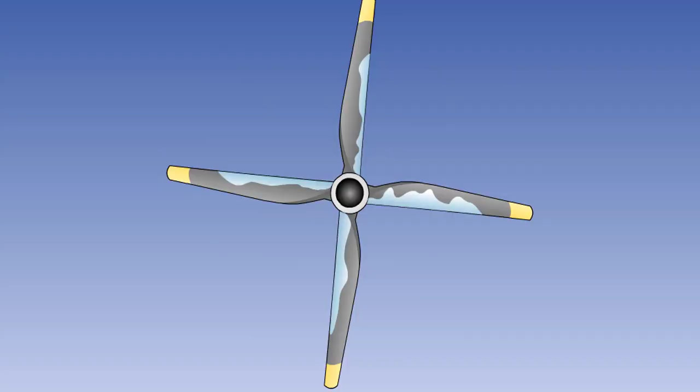Ice formation on a propeller blade produces distortion to the aerofoil section, causing a loss in efficiency and possibly causing unbalance, which can lead to destructive vibration. The build-up of ice must be prevented, and this is usually done by electrically heating the propeller blades.

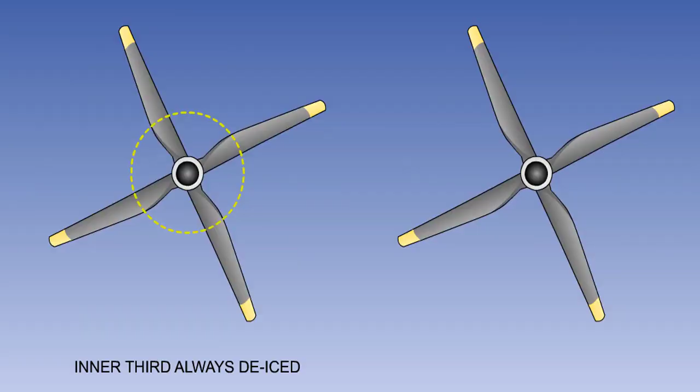Because of its thickness and lower speed, the inner third of the propeller blade is most susceptible to icing, and is always de-iced. In some installations, the middle third is also de-iced. The outer third of the blade is not so susceptible to icing, and is not normally de-iced.

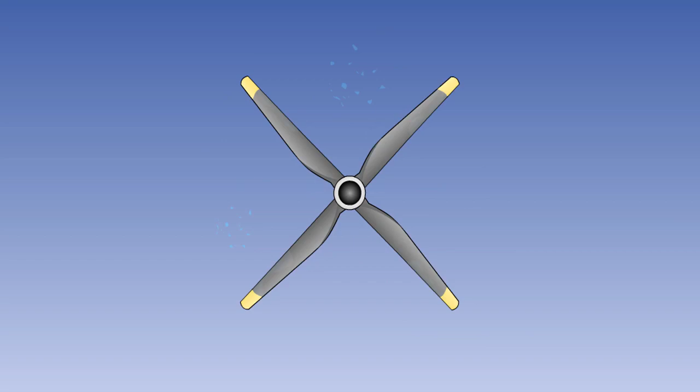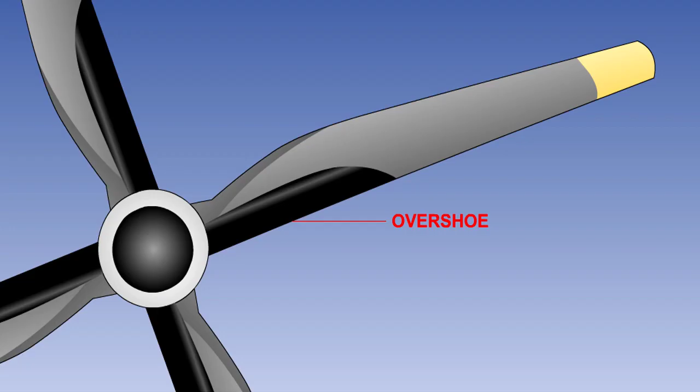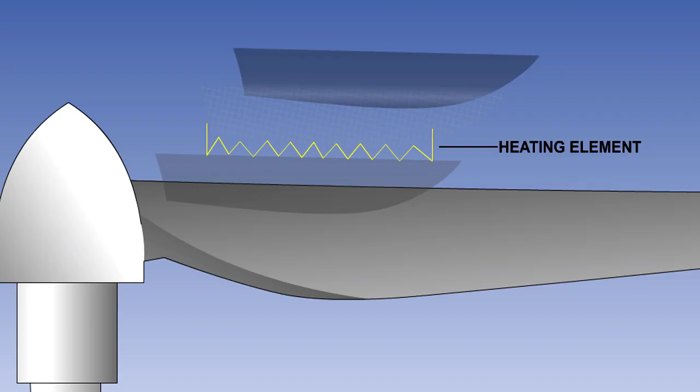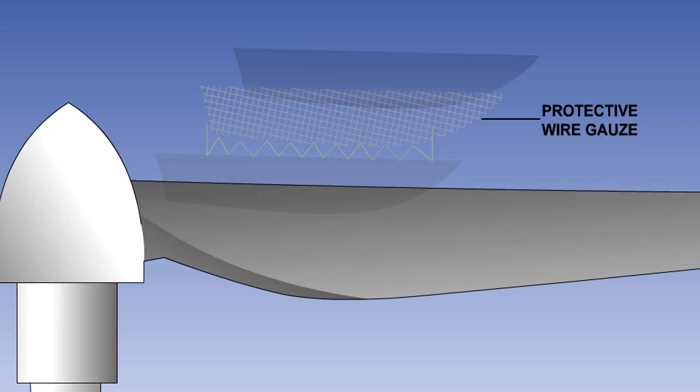The electrical heating elements are usually fitted in components known as overshoes or boots. The construction of the overshoes varies between propeller types. In a common installation, the heating element wires are interwoven with glass threads, which form a glass cloth base, which is cemented between sheets of rubber. A protective guard of wire gauze is cemented beneath the outer rubber covering. The overshoe is shaped to fit around the blade leading edge and is cemented to it.

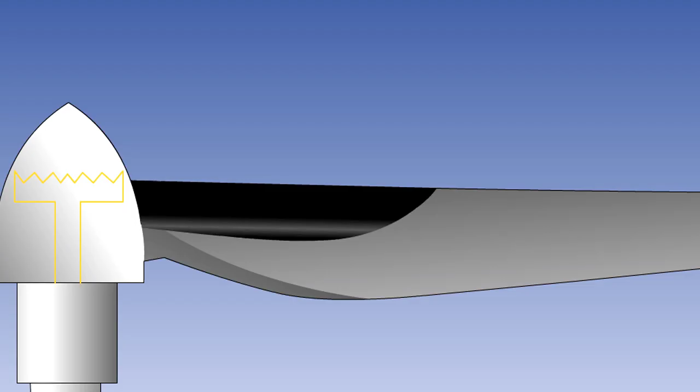In the case of turbine engine propellers, the cover over the pitch change mechanism, or the spinner as it is known, may also have electrical heating elements embedded in it.

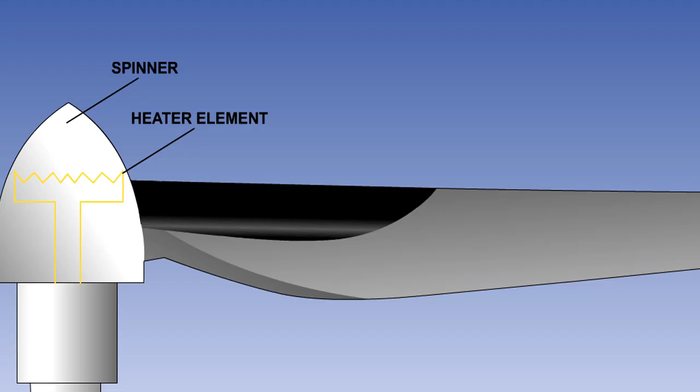Depending on the type of aircraft, the electrical power for heating the elements is either direct or alternating current. These systems consume a relatively high amount of electrical power. However, they are controlled by employing a cyclic timer, which will de-ice the propeller blades of one engine at a time, thus reducing the power requirement.

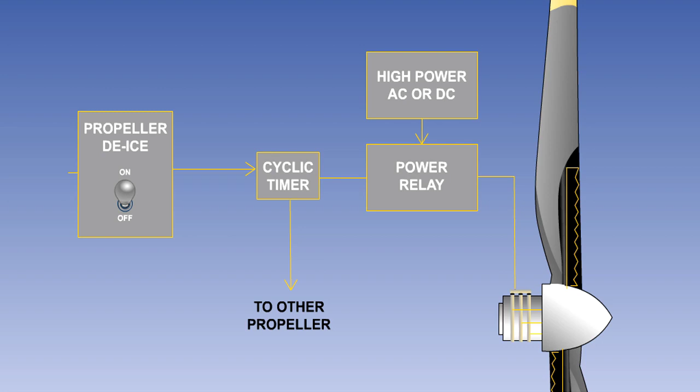In some installations, a power relay is fitted in the engine nacelle. It allows the length of heavy high current wiring to be kept to a minimum, with light cable being used in the control circuit.

In turbopropeller engine installations, the propeller heating circuit may form part of a power unit de-icing and anti-icing system, with the cyclic control being integrated with the engine air intake heating circuit.

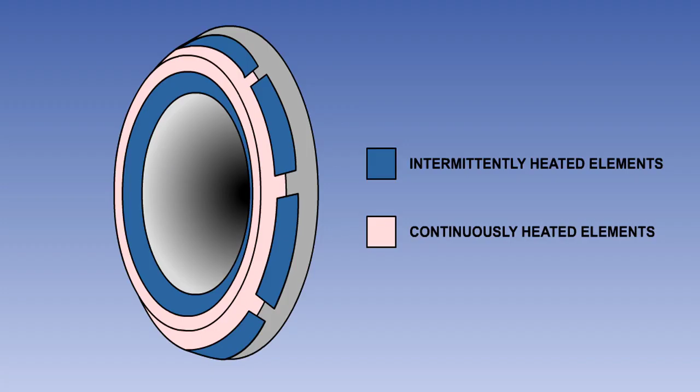The power required for heating is conveyed to the elements via cables, slip rings, and by brushes, contained within a brush block housing. Slip rings and brushes are components used to transfer electrical power from a stationary part to a rotating one. They are fully explained in the Electric Systems series of lessons.

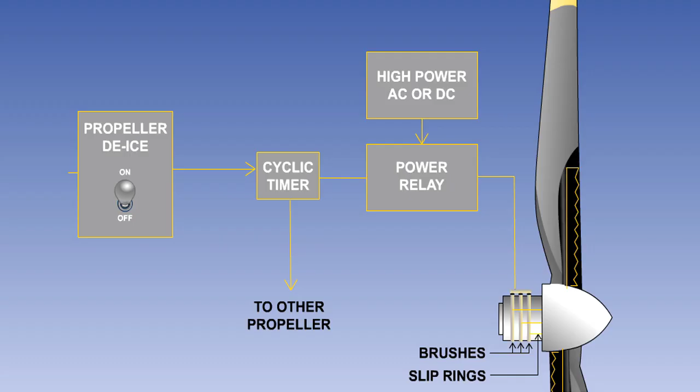In icing conditions, during the unheated period, a thin film of ice will build up on the leading edges of the propeller blades. Before this film builds up sufficiently to interfere appreciably with the aerodynamic characteristics of the blades, the cyclic control applies heating power. The ice in contact with the blade surfaces melts, breaking the bond between the ice and propeller blade. The remaining ice is then carried away under the action of centrifugal and aerodynamic forces.

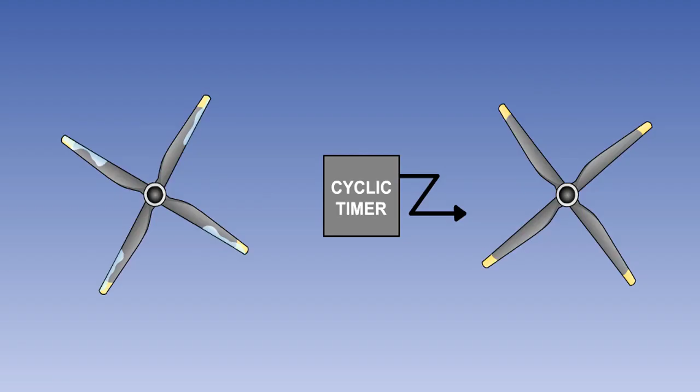That is the end of the lesson on propeller ice protection. You should now know that electrical propeller de-icing is usually done cyclically, and that on turbopropeller type aircraft it may be integrated with the engine ice protection system.